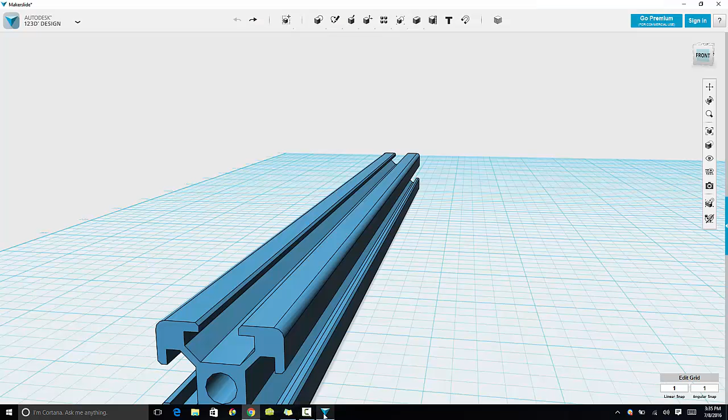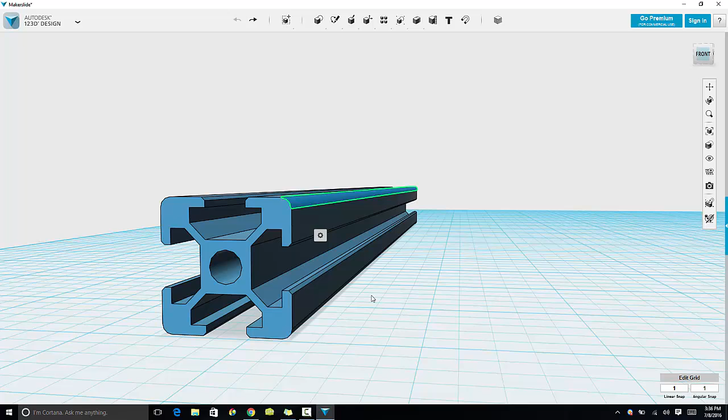The first thing we're going to do, if we take a look at this drawing, it looks like the edges are pretty much not really rounded - they're more or less flat. So I'm going to get rid of all the rounded edge profiles that we made in the last video. This isn't really a requirement - you could probably leave them and it'll be just fine, but I'm going to do it anyway because I want to try to mimic this design as close as I can.

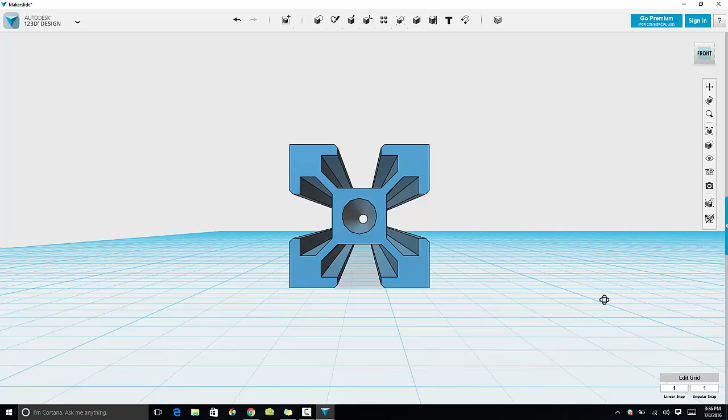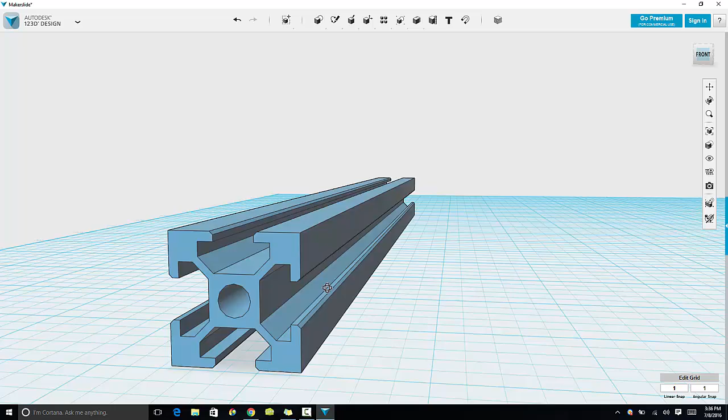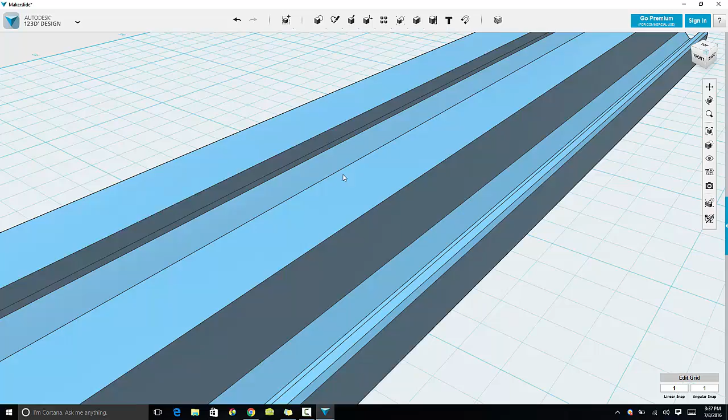Now that we've done that, I'm not going to do anything with these beveled edges. Even though it's hard to see, it looks like they don't even have that stuff - it's all flat, so I'm not going to remove that. If you guys want to, you can do the same thing I did here - I clicked on the rounded part and hit the delete key, and it makes it back into a straight corner again. You could click on all of these, click on this profile here, and delete that to make it a straight edge, but I'm not going to go that far.

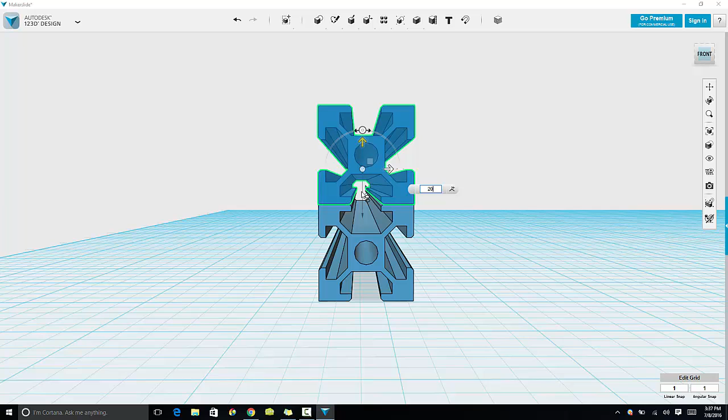Now that we've got our rounded edges deleted, we're going to go back to actually getting this going here. So what we're going to do is Control-C to copy it, then Control-V to paste it, and move it up 20 millimeters for another copy of the channel. So now we've got a channel that is starting to look like what we're trying to achieve here.

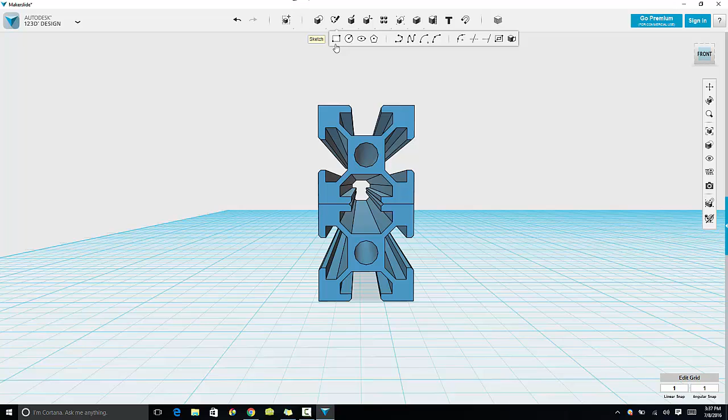The next thing we're going to do is project all of this stuff to make modifications to the face easily, so we're going to project this face and project that face. Now we basically have something that we can edit. At this point, if we really wanted to, we could delete these shapes, but I'm not going to bother - just going to leave them there, they're not getting in the way.

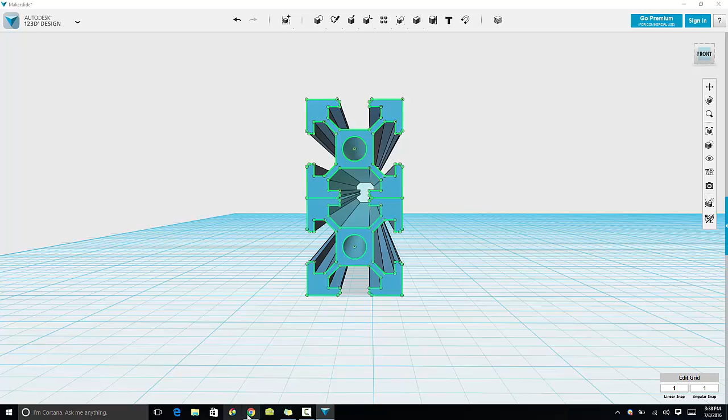So we need to start modifying stuff on this sketch here to line up with what we've got going on. What we need to do is create this little triangular profile on the top and on the bottom, and that's saying it's 4.75 millimeters long.

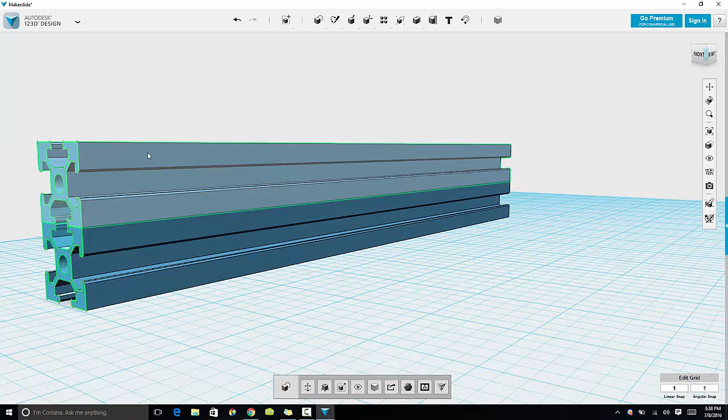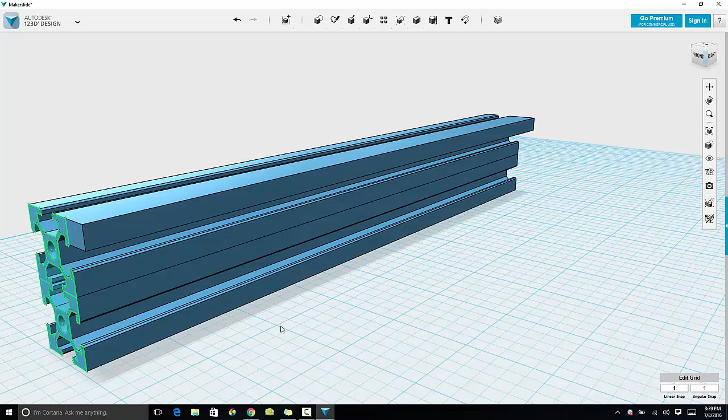So what we need to do there is extend this face out into this face here. We're going to pull it out this way - no, that's not what I wanted to do. All right, hang on, let's try that this way. I wanted to extrude it out - there we go, that's what I wanted to do. So now we've extruded that face out, and we're going to do the same thing, extrude it out in this direction a little bit. The reason why we're doing that is we need a face to be able to draw on in order to accurately get our stuff.

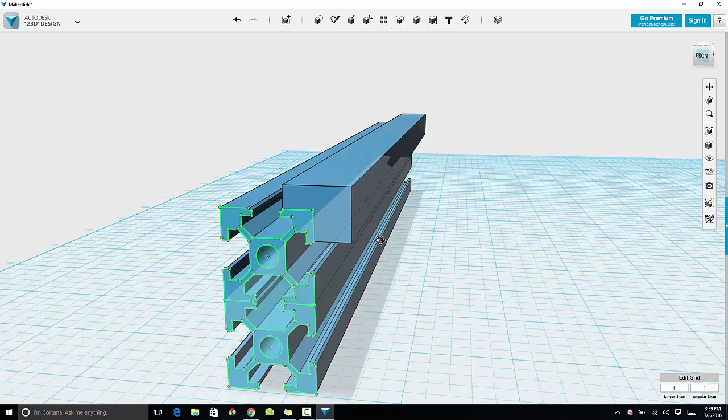If I just try to draw this out where there's no shape, when I go to draw stuff it's possible that it can get messed up. So you need a flat surface oftentimes to actually draw on - otherwise it's just going to make stuff really crazy. So now what we need to do is start drawing that triangle.

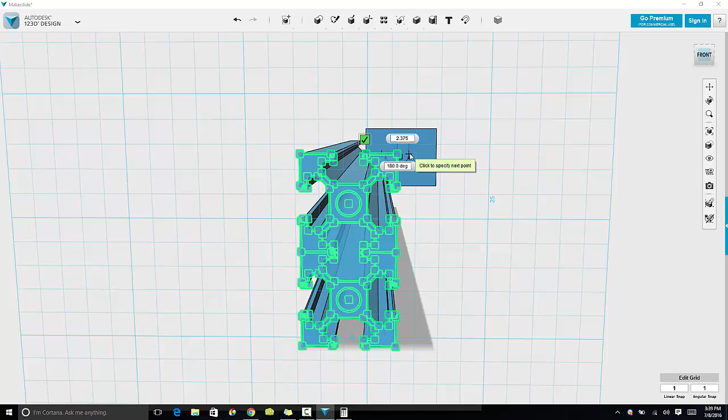And what we can do for that is we want to take 4.75 and divide by 2, and that's how far we're going to need to come out. So 2.375. Let me get my line tool and come out 2.375 mils. So there's my 2.375 mil line.

Now we need to do the same thing in this direction. This channel is 40 millimeters long, so that means from triangle to triangle there's 6.35 millimeters. We need to go 6.35 divided by 2 to get the height of both of those triangles, and that's 3.175.

So now I'm going to draw another line that's going to come up 3.175 millimeters. Now you've got a line that's 3.175 millimeters tall, and we're going to connect that to there, since that's how this is done there. So 6.35, just what I did there, divided by 2, 3.175. That's how I've got my millimeters, how high to go up there.

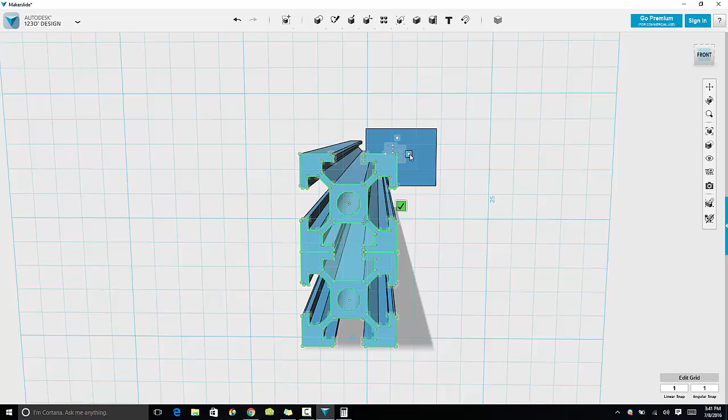Next we need to turn around and do our 2.375 in the other direction. So let me do that. 2.375 in the other direction. Now we've got our lines to follow, and we just need to connect these. So let me connect that to that.

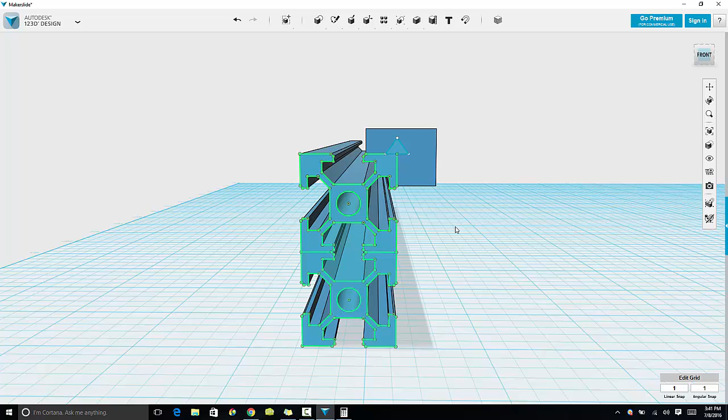And then now, if I actually wanted to, I can come back in here and trim away that profile there. And now I've got a triangle that I can extrude back to make the actual part of the channel. So I want to do the same thing with this bottom part.

I'm going to do that off screen real quick. I'll quickly recreate the same triangle down here by extruding this face out, and then doing the exact same dimensions that it shows on here that we did for the other one. I'll be back in just a second.

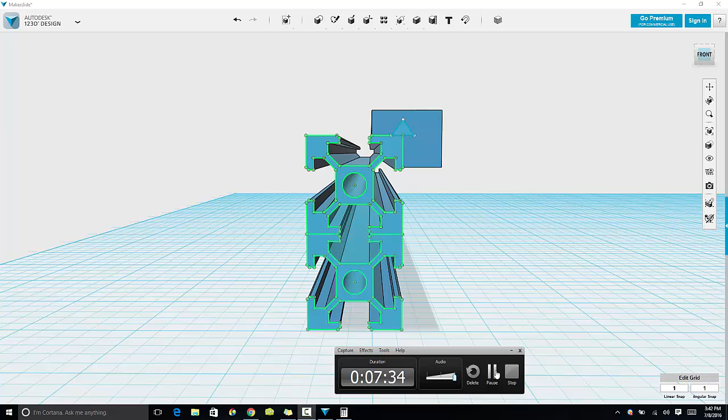Alright guys, now we're back. As you can see, I did the exact same thing. I created the exact same triangle on the bottom as I have up top. So 3.965, 3.965 - exact same triangle created on the top and the bottom. And then we can leave these sketch profiles extended, it's not a big deal.

The next thing we need to work on, we can see that this part here is shaved off. So really what we did here is it looks like we pretty much just followed through with this to this line and just went straight down. So that's what we're going to do next.

We're going to actually draw a polyline. We're going to click on this shape and draw a polyline from here all the way down to there. And that's our 9 millimeter polyline there. That's going to create our line that we're going to follow here.

Now pretty much all we need to do is do our polyline and follow this sketch to that line. So now we're at our 3 millimeter line there, and we've got this shape that we can pretty much just cut out here.

Same thing, you need to do the same thing down here and follow this for 3 millimeters. It still snaps to that line, and then now we've got these two profiles that we can pretty much extrude out. So if we look at that, that's kind of what they did there.

They followed that and actually cut it all out like that. And you can see they did the same thing on this other side over here - they cut these profiles off over here as well.

So we can turn around and mimic that. It's the same thing that we did before - draw the line straight down. I won't cut this part out yet because it's nice and quick.

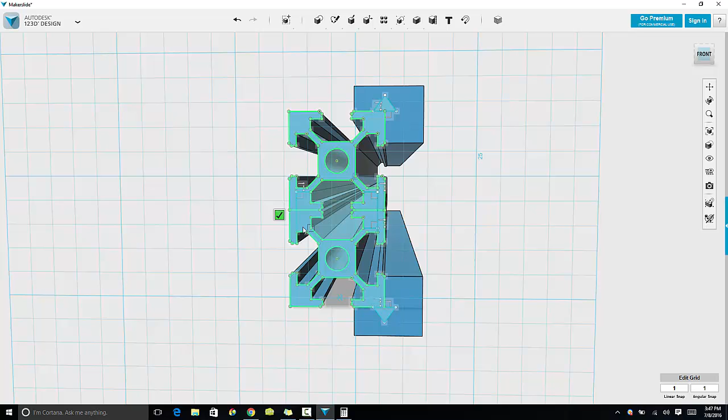So we turn around, same thing, and snap it there. Done. And then turn around and grab the polyline and do the exact same thing here. So now we've got - this must have stopped a little short. All right, oh no, there we go.

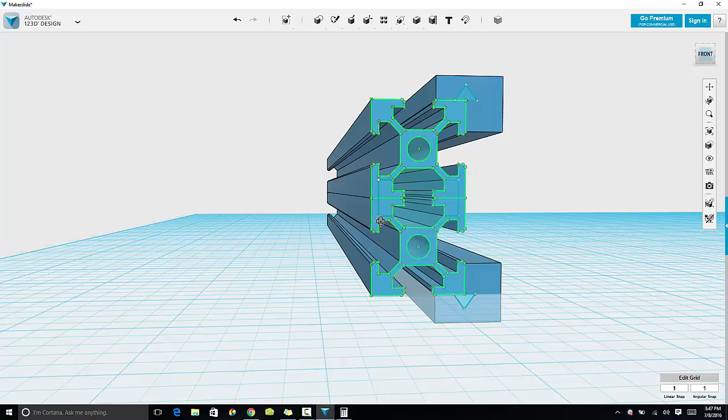Okay, so it's good. Now we can cut all of these 4 profiles out here. So that's what we're going to do here - we're going to turn around and extrude this and cut that profile.

Come on, there we go. We're going to extrude this back and cut these profiles out. So we'll say -1000, say -1000, whatever, or 1000.

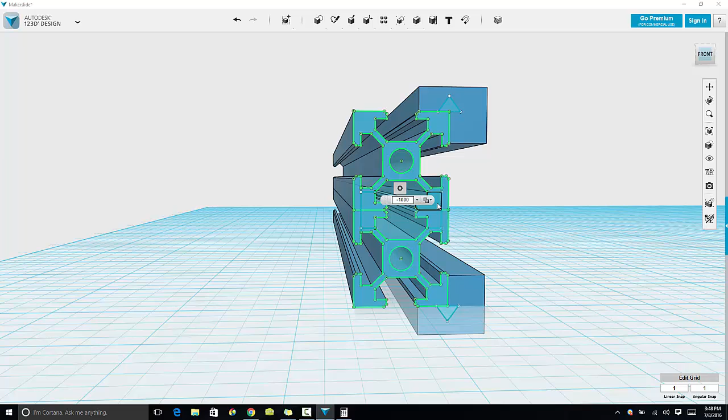And we want to subtract. So click the little dropdown, make sure it says subtract. That's going to cut that face out, and we're going to do the same thing to these other ones - extrude them, subtract, and say -1000. That'll cut all of these faces out here.

Let's extrude another -1000. I'm going with -1000 because I know that'll actually cut out the shape there. Same thing, extrude -1000.

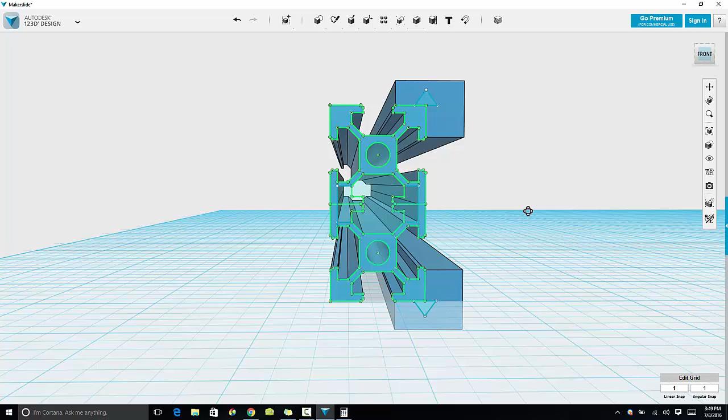Done. Okay, so now you guys can see if I turn these sketches off, we have actually created this part, pretty much right here, the profiles that align themselves there.

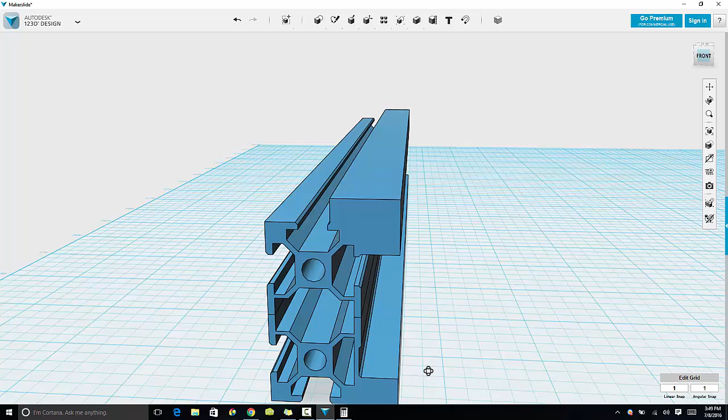Another thing we've got to do here real quick is extend this profile to here to create that bridge. We can come up to the construct tab and say extrude, click on this face and then this face, and it will snap it to that and extrude it all the way down. Now you can see we have that extruded all the way down until it met the other face there, so that created our profile.

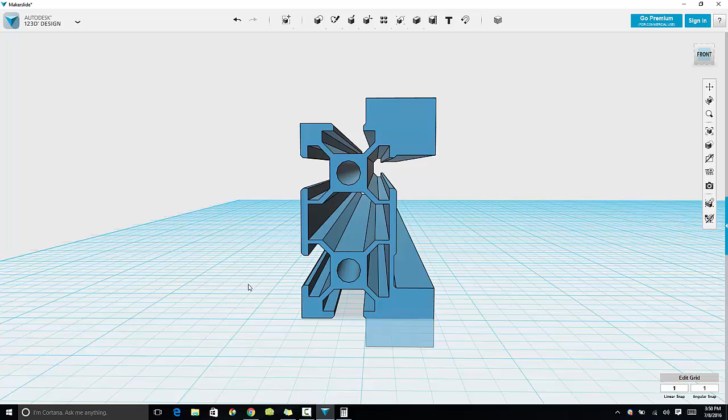The next thing we need to do, we can kind of see there are these division markers, but we can turn around and merge this all together. So that's what we're going to do. We're going to merge this shape with that shape, and that's going to solidify that bond there.

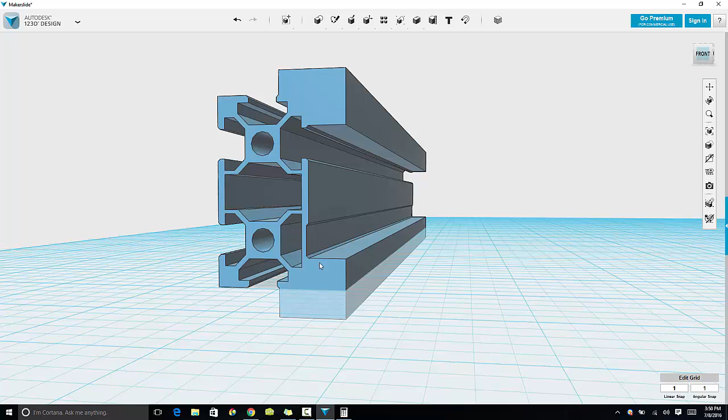If we really wanted to get fancy with this, we could delete this edge and make it extrude all the way down, because that's kind of how they did it there. It looks like they deleted this edge here.

So if I zoom in here, I should be able to zero in on that and delete. If I undo what I did there and delete this edge, and delete this edge down here, I can create a more solid profile.

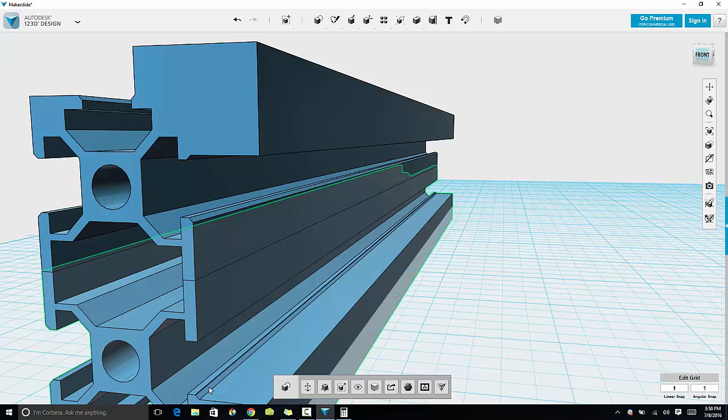And the reason it won't let me do that is because of this blocky shape. So let me take this, and in order to do that, we're going to have to extrude this back to there.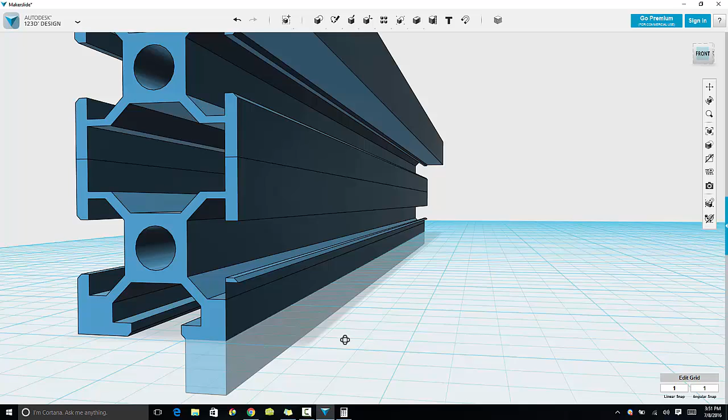And then what we can do—that's too far, that's not how far I wanted to extrude that. I wanted to extrude it back to there. So that relieved or got rid of everything we originally did to it.

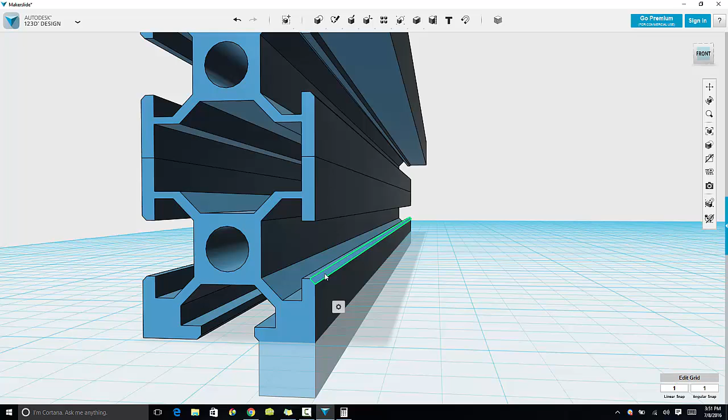And then I can delete that, and now I can extrude this and it will actually mesh completely up with that shape, which is probably the better way to do that. And then now I can remerge these two shapes, and there we go.

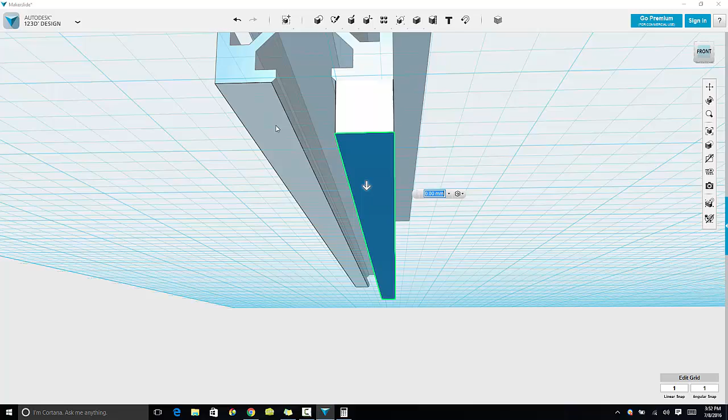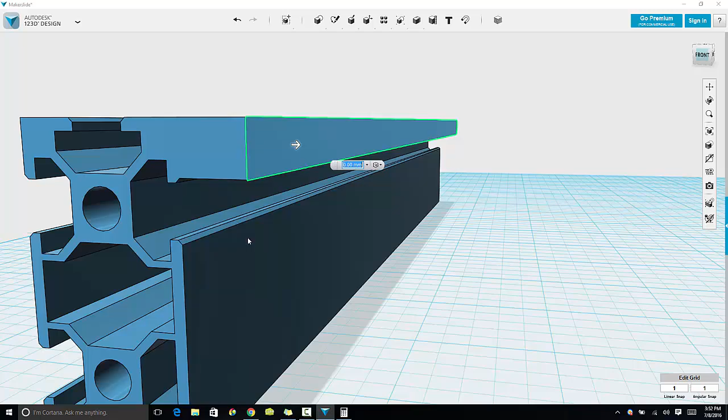The same thing, I'm going to get rid of this bottom shape down here by extruding this back to that surface. That cleans that up. I can do the same thing here by extruding this surface down until it matches that surface. And then turn around and in the same regard, extrude this until it matches that surface. So there we go—that essentially is very close to the shape.

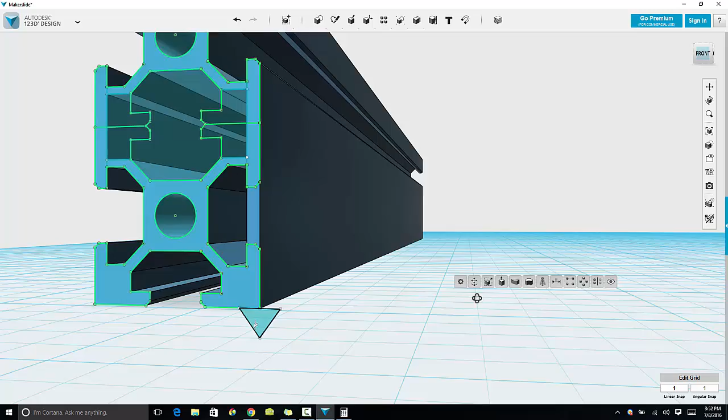All we've got to do now is turn our sketches back on and extrude this profile all the way down the length of the shape. I need to extrude that all the way until it gets to here.

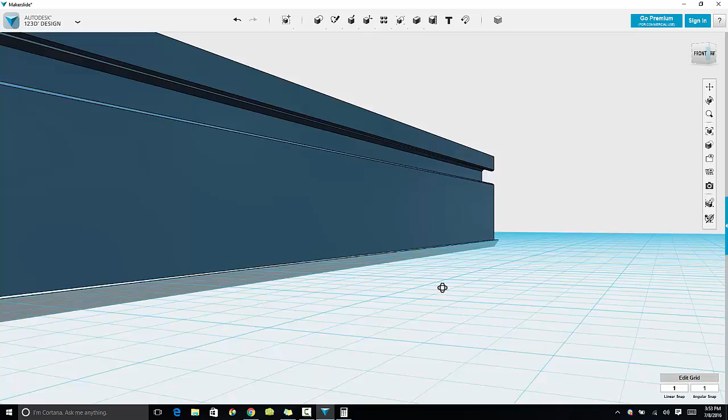And then that should line up with the bottom of the shape, and it does. So I can do the same thing here: click this, say extrude, pivot over to the other side of my shape here, and then just click there, and boom, it snaps directly to that. So that essentially is our shape there. We have made the shape that is shown on here.

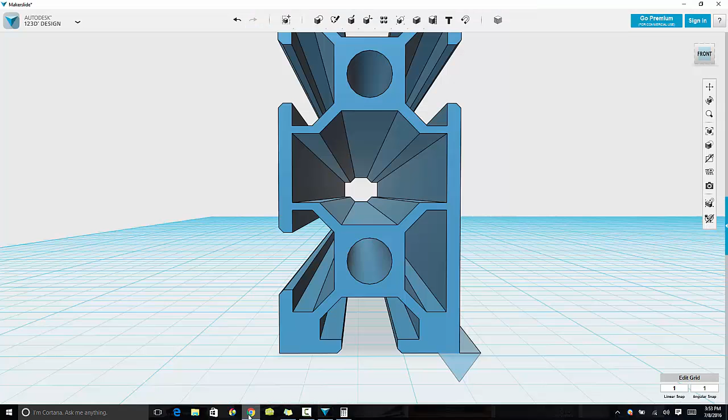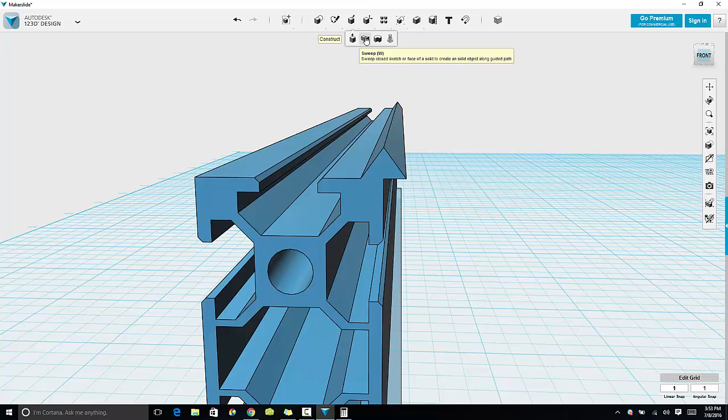Now it looks like they did a little bit of chamfering on the corners there. It kind of looks like it, it's hard to see. It looks like they might have added a chamfer on the corner, but that dimension's not outlined. So if I really wanted to, I suppose I could chamfer this corner a little bit, either round it if I wanted to, or do something else a little bit more intricate.

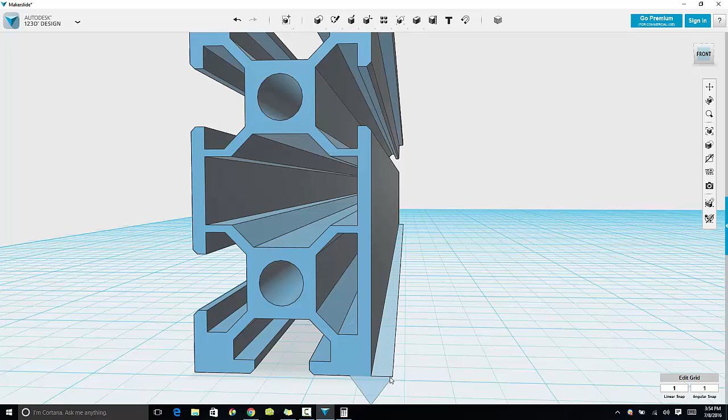But I can turn around and add a slight chamfer to this corner, maybe 0.5 millimeter, and that'll kind of add a little bit of a bevel shape to that. I could do the same thing down here, turning around, clicking on the edge, clicking on chamfering, and then bringing that in 0.5 millimeter as well.

So you can kind of play with that, or you could even fillet it and round it, however you want to do it, and you can clean that up. But since that dimension's not outlined, we're going to leave that as being a little bit flexible as far as what you can do with this channel.

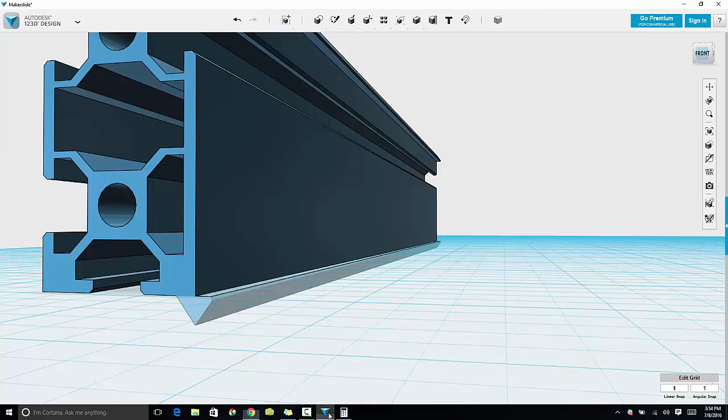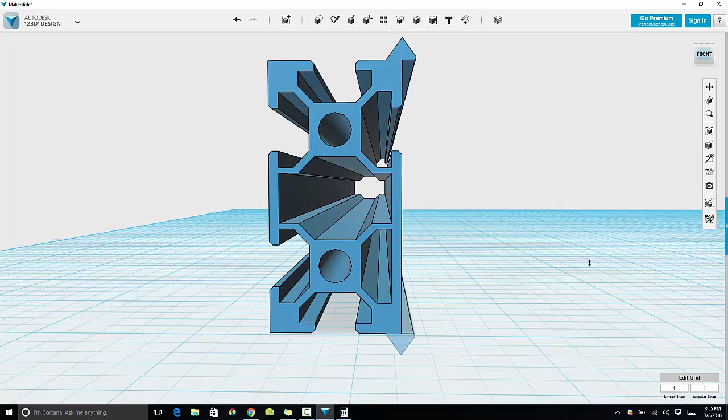So anyways, you've got something that actually matches the MakerSlide that you see, and you may have seen on various CNC machines and other devices. So now we're going to go through how to make the quad slide, and then we will move on to something else, or we'll end the video.

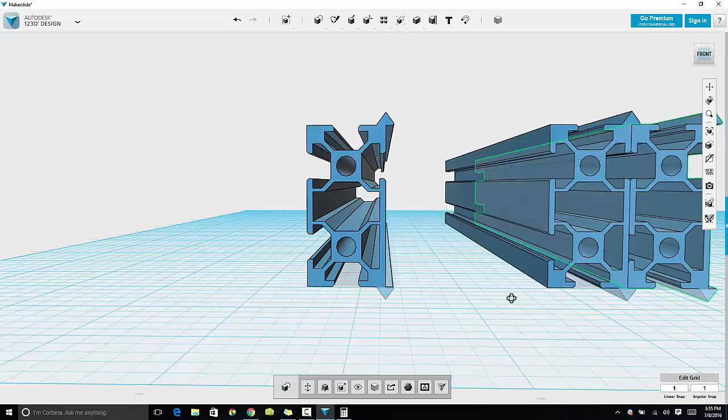So I'm going to copy this, and I'm going to move it over, and then I'm going to copy this and move it over 20 millimeters till that matches up there. So we're going to leave that shape to the side, and I'll upload both of these shapes once I'm done with the video.

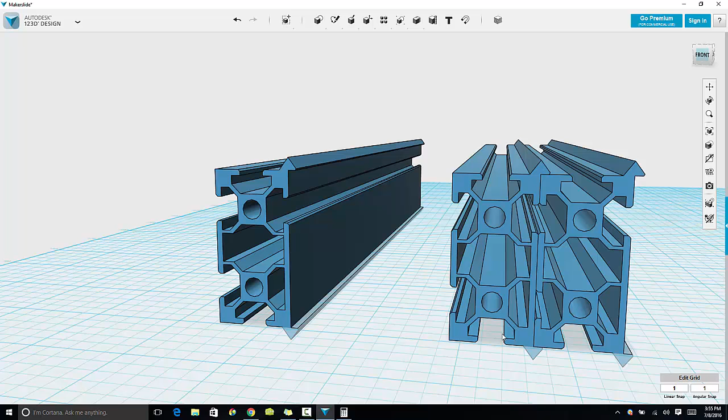But now what we're going to want to do to make that quad looking shape is we need to follow the quad slide design here. So it's pretty much straightforward and simple. Really, all we want to do is just get rid of all of these center pieces here.

So what we'll do first is turn around and do the same thing we did to start off with before. We'll project all of these shapes here, and that'll help us get our profile started. So we'll zoom in, move over, and then start doing what we need to do here.

So you guys might have already identified the best way to do this. We'll just do the polyline, and then the same thing, do the polyline here, and polyline here. Just like that, we pretty much have a design that we can turn around and get ready to extrude it all out.

So first of all, what we're probably going to need to do is separate some of this stuff here, because we don't want to be deleting things that we don't want, or deleting things that we actually need to keep.

So really what we need to do when we look at this is make it to where we're just deleting that center part here, so just this leg. And then this part obviously doesn't exist either, so it's pretty much hollow all inside of there.

So what we'll do is take a polyline, and we'll do a polyline from here to there to separate the shapes, so we're not deleting anything we don't want to delete here.

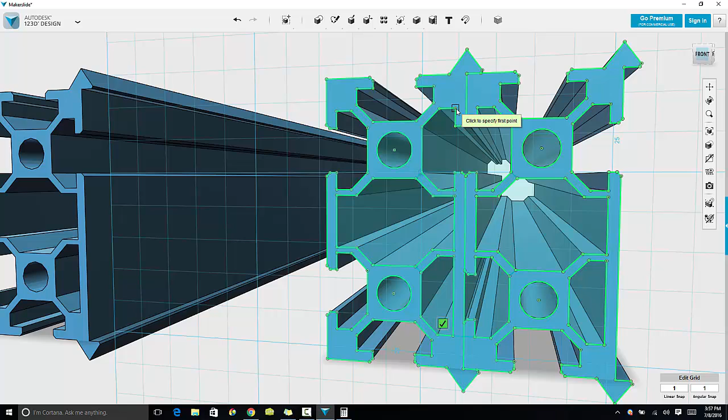And then we'll also have our polylines there. Let's see how this looks now. So now we would just be deleting the shape part that we actually want to delete. If we turn around, once we draw our line there, it cuts off the rest of the shape and will only remove what we want it to remove.

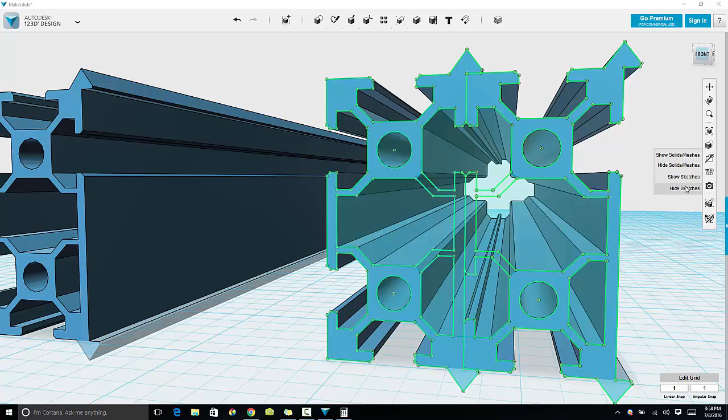So what we need to do now is extrude this part out. I'll do the same thing, minus 1000, because I know it's going to delete everything that we don't want. And then do the same thing, extrude this out and say minus 1000, and that will also extrude that part out. So now you guys can see that we have our hollow center that we wanted here. We made our hollow part inside of here.

The only thing we've got to do is, and it looks like I might have messed up there because I deleted some stuff that I didn't want to delete. Yep, I did, so my bad on that one. I wanted to keep this part here.

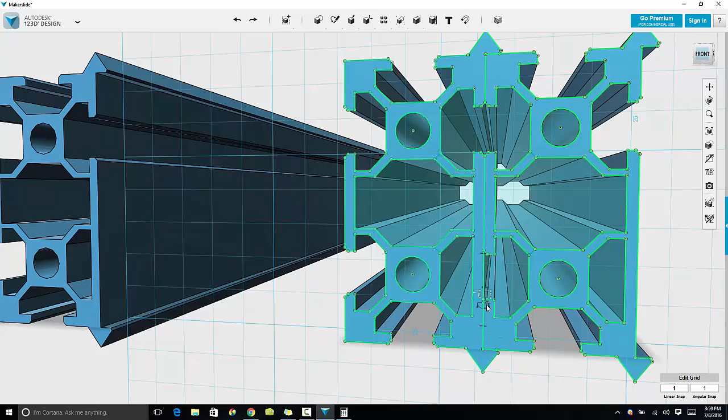So we'll turn around, zoom in real quick here. I'm not going to try to get ultra precise with this, but you guys kind of get the point at this point. It's 0.707, so really all I need to do is come off of this point and then go 0.707 and look for that to line up right there.

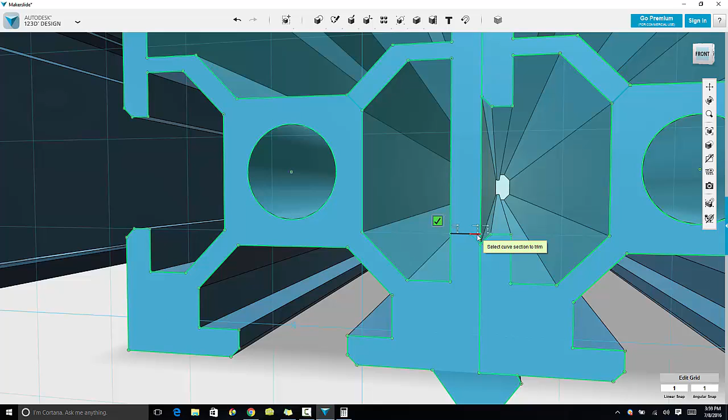So there we go, we have recreated that profile over there. And then just do a little bit of trimming to clean it up. Right there, done. And now we can actually turn around and do what I originally wanted to do.

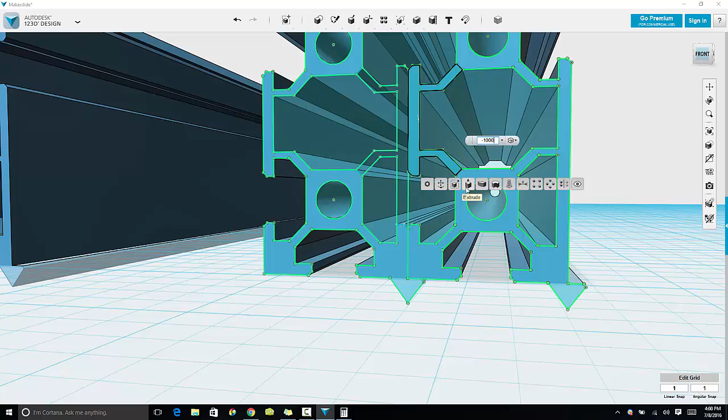Extrude this profile all the way out, and then do the same here, extrude that profile all the way out there. So now we have essentially, we're getting to the point where we have the shape that we want to have here in the center.

The other thing we need to do is look at this part up here. We can see that really all they are doing here on this quad slide is joining all the outer pieces together to create that quad channel. So essentially what they're doing is exactly what we did over here with part of that.

They're turning around and first of all, they're going to draw this polyline right here. That will allow us to delete all of these triangles. So we want to turn around and delete all of these triangles off the slide here.

Do the same thing again, polyline this till we get to there. And then in the same regard, extrude minus 1000, done, gone. And then do this, the obvious, two more times to turn around and delete what we don't want down here.

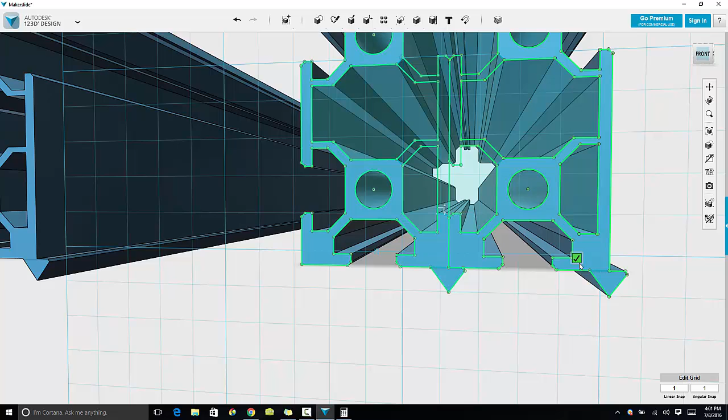So turn around, same thing real quick here. This won't take us but a second, and then we'll move back into what needs to be done to finish the rest of this.

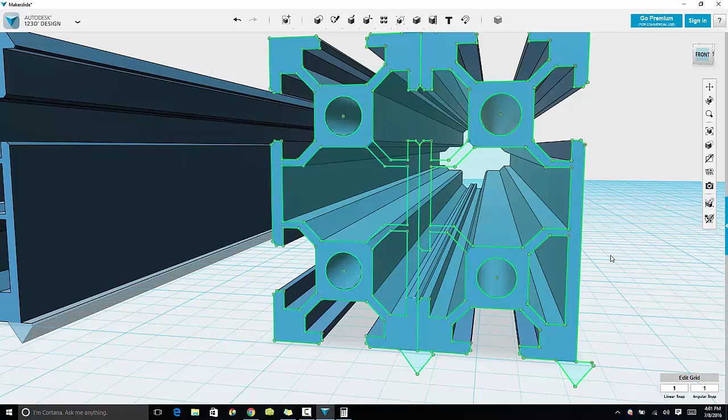Okay, and then there's all of our triangles deleted. So now we need to start working on actually bridging the gaps that we want to be bridging here. We kind of already did this side, we already know that this side is correct, so we want to quickly bridge this side. What we need to do is draw our polyline from here to there.

And then also, if we look back at this shape, we just want that to join up into those pieces. So really, we need to turn around and draw a polyline from here to there, and here to there.

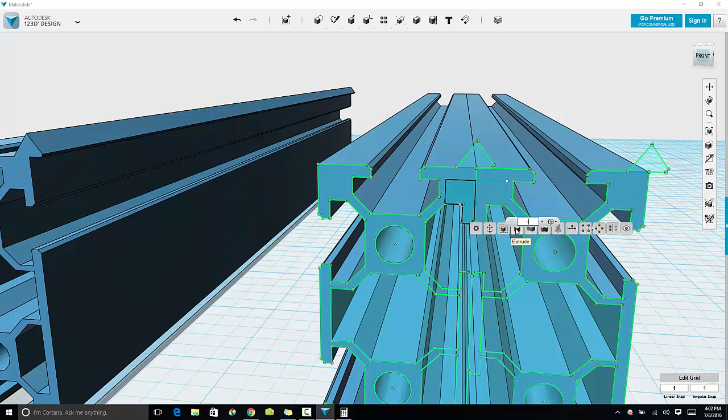So now we can gut out the shape here that we don't want. Remove that, and then also remove this. So now that part of the shape has been removed and deleted. We've kind of got what we needed to have happen there.

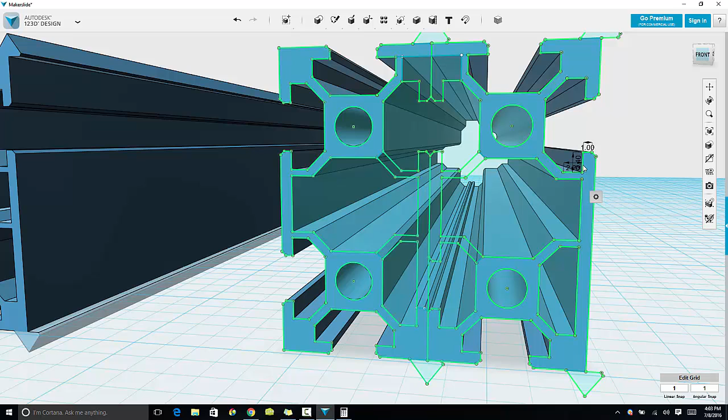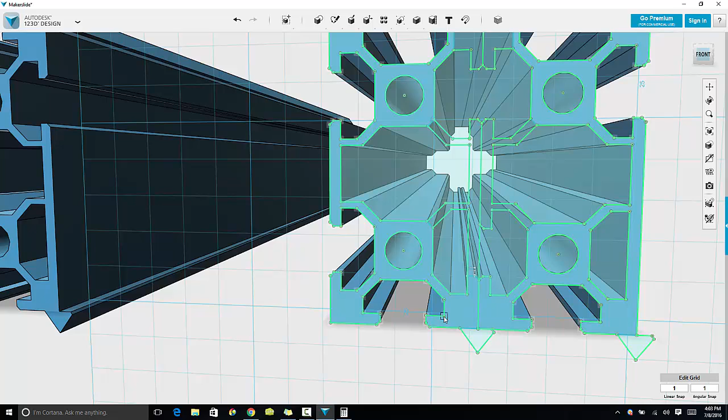If we turn around and do the same thing down here real quick, and then we'll mess with this side in just a little bit. Come under Sketch, Polyline, and do the exact same thing, and bring this line all the way across. Bring this line down to here, and bring this line down to here.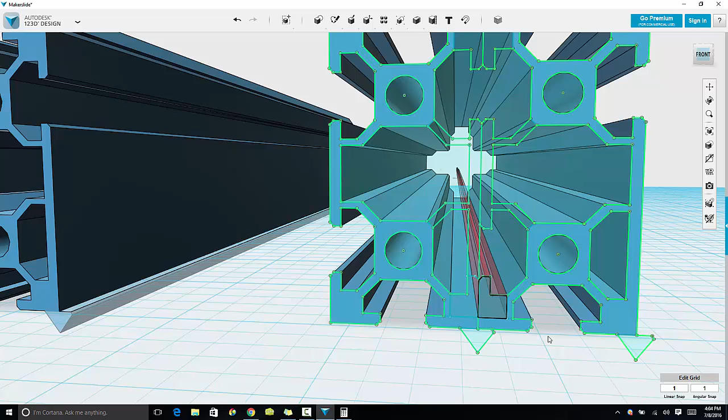You can do the same thing and remove this chunk. Again, extruding it out, -1000. Extruding it out, -1000. And you guys can see that we've actually got a shape that's almost what we were looking at.

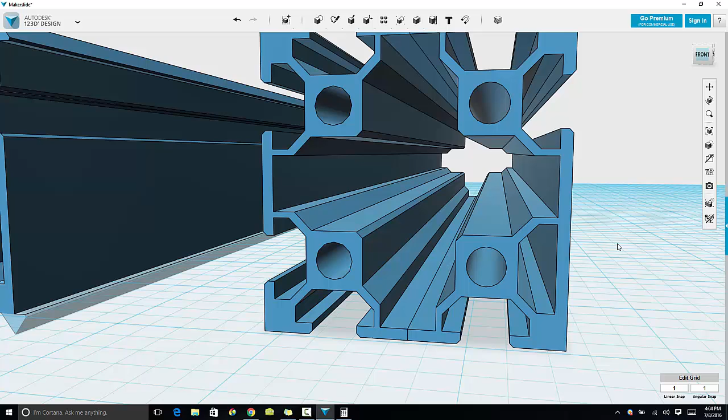The last part we really need to clean up is this part right over here, and there's really only a couple things we need to do, and that is get these dimensions back correctly. So really what we could do here, if we wanted to be more constructive or make things easier on us, instead of actually deleting this last part out, this is a good opportunity for me to show you a new command that we can use here.

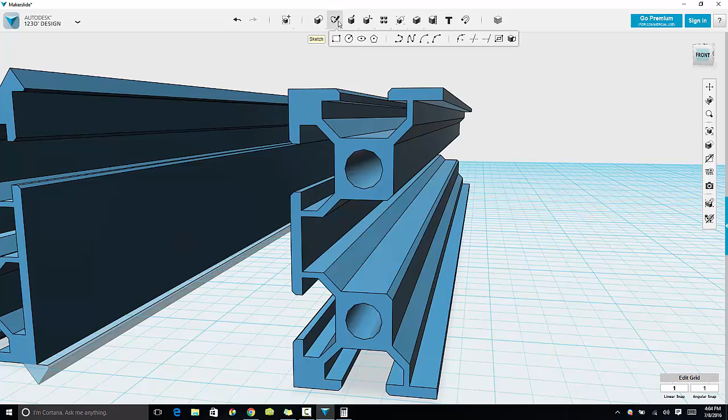So really what we'll do is use the mirror command here. This is a perfect time for this command, and it'll work real well for this. The mirror command is going to allow us to draw a line here. That line probably doesn't have to be all the way this long, but I'm going to do it this long anyway. Get it to snap.

Okay, draw a line here. Click on, we want to go up to where it says mirror. Click on the solid that we want to mirror, and then click on the mirror plane, which is this, and it'll create a mirrored copy on the other side.

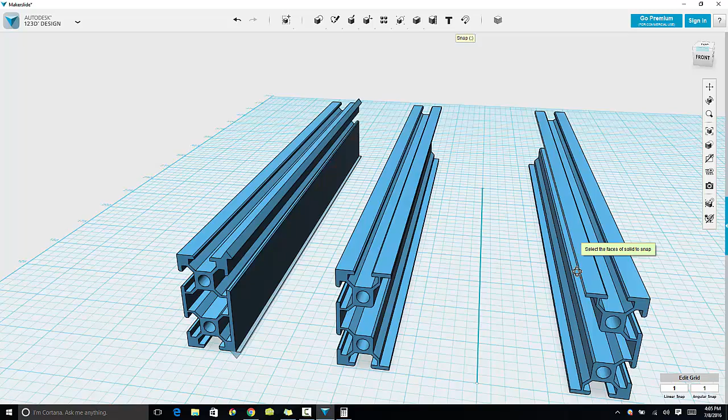And then we can just take and snap these parts together, and just like that we can turn around, come up here to merge, and we can merge these shapes together, and just like that we have created that other part of the channel.

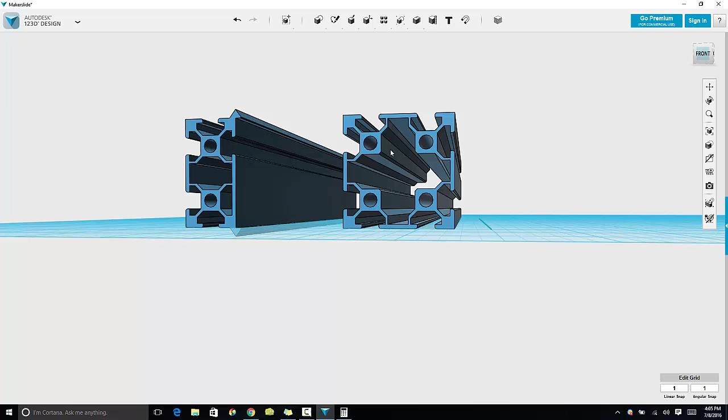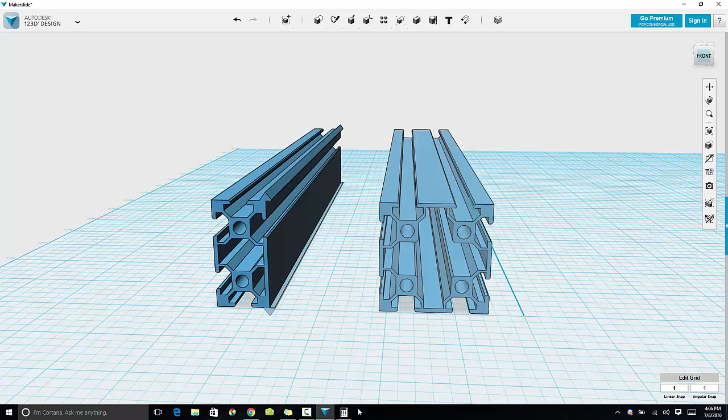In retrospect, this was probably the easier thing from the get-go, just doing this side and then mirroring it, but I kind of got to take a nice little detour and show you guys how the mirror command works right here at the end of this tutorial. So if you look at this, that is exactly pretty much the same as this side over here, except for the fact that it's mirrored. Both of these shapes look almost exactly what you guys see here.

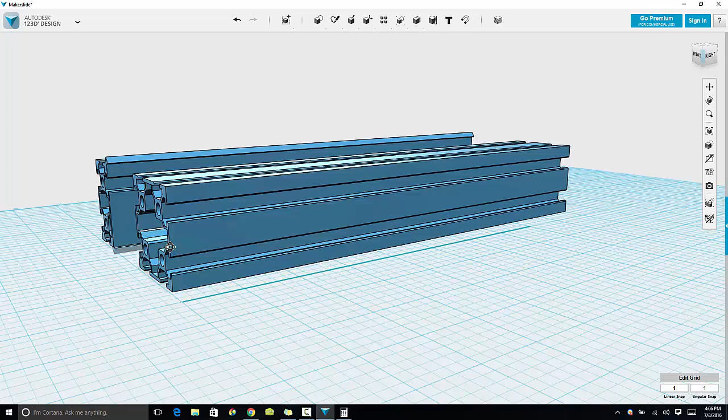That is essentially how you turn around and create these MakerSlide things. Now, depending on the height of your 3D printer, you more than likely want to print these face down, with the face on the printer. Otherwise, you're going to need support material all inside here to be able to print this up. So really printing this would be best with this face down on the print bed.

So that is essentially how you do these two MakerSlide shapes.